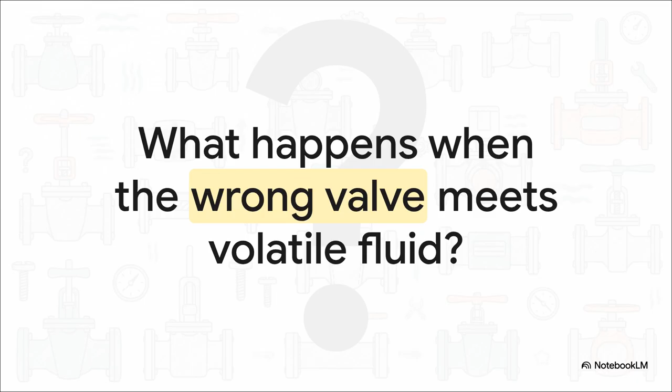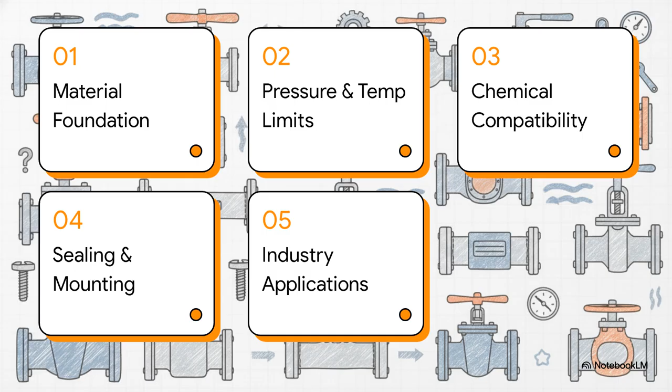Okay, so let's break this down step by step. We're going to cover 1. The material foundation, 2. Pressure and temperature limits, 3. Chemical compatibility, 4. Sealing and mounting configurations, and finally 5. Industry applications. Let's kick things off with Section 1, the material foundation, establishing the baseline.

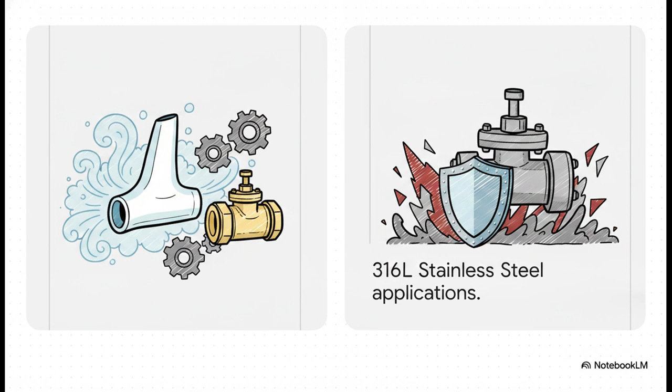Every solid system starts with the right building blocks, right? And in the world of industrial valves, we basically have 3 main characters to play with. First up, we've got polymer, specifically technical polymer. You can think of this one as your lightweight specialist. It's absolutely perfect for compressed air and simpler, less aggressive tasks.

Next is nickel-plated forged brass. This is your reliable standard. It's going to give you the mechanical strength and the long service life you need for a vast majority of universal applications. And finally, we have 316L stainless steel. This is your heavy-duty shield. When the environment is harsh or the fluid is just completely unforgiving, stainless steel is the armor your system needs.

Moving on to Section 2, pressure and temperature limits, pushing the boundaries. Now, check out the stark contrast in these pressure capacities. It's pretty wild. If you're running a basic compressed air or water circuit under 10 bar, a polymer valve handles it perfectly, no sweat. But the second you push past that 10 bar mark, polymer is going to fail. You have to escalate to nickel-plated brass, which can comfortably manage up to 40 bar of pressure.

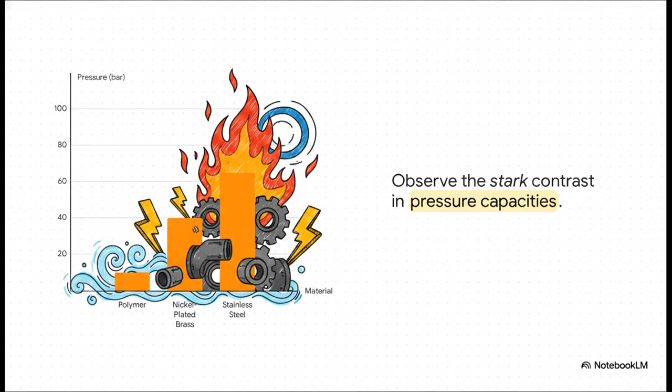But hey, what if 40 bar still isn't enough? For those truly intense, high-pressure industrial applications, 316L stainless steel steps up to the plate, pushing that boundary all the way up to a massive 65 bar. But pressure is really only half the battle here. Temperature is the other piece of the puzzle.

Imagine you're operating a system outdoors in a freezing environment. Your standard polymer might only survive down to minus 15 degrees Celsius, but your nickel-plated brass valves, they can keep going all the way down to minus 40 degrees. On the flip side, if you're dealing with extreme heat, standard brass is going to top out around 100 or maybe 130 degrees. For anything hotter, pushing up to 150 degrees Celsius, and sometimes even higher depending on the setup, you absolutely must rely on the thermal resilience of stainless steel.

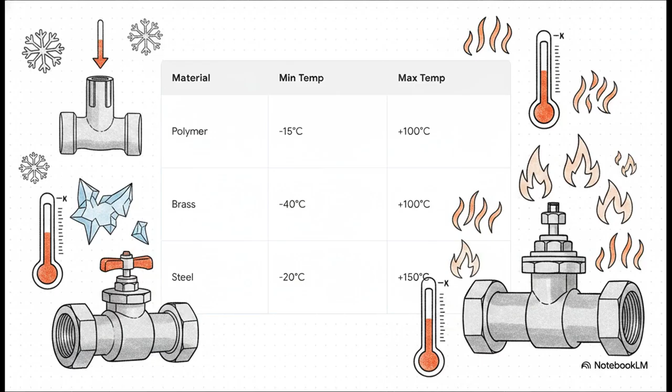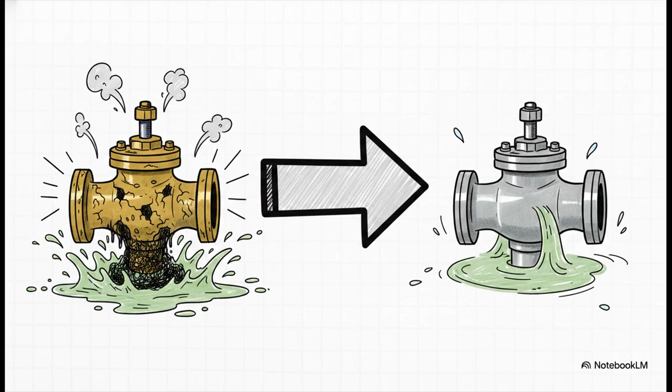All right, Section 3, chemical compatibility, surviving volatile fluids. So here is an absolutely crucial point. What happens when the fluid itself is the biggest threat to your system? It's a super common trap to just assume a rugged brass valve can handle anything you throw at it. But if your industrial circuit is conveying highly corrosive liquids, you've got to pivot immediately from brass to 316L stainless steel.

Stainless steel offers outstanding chemical compatibility, where brass would literally just degrade over time. Trying to use a brass valve for a highly corrosive chemical, that's not a smart cost-saving measure, it's just a structural compromise waiting to blow up in your face.

Let's rapidly run through this guide for volatile environments. Because remember, it's not just about the metal body of the valve, it's about the internal seals too. If you're running gaseous oxygen circuits, you need specifically coated clean seals to literally prevent combustion. For high-temperature water and steam circuits, you're going to want to specify EPDM or PTFE seals.

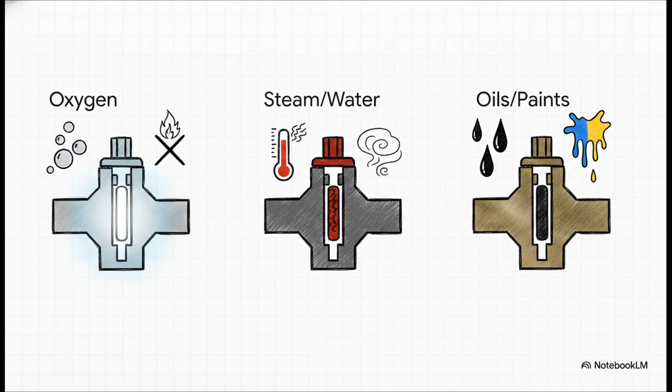And if you're working with synthetic oils, ordinary petrol, or paints and their solvents, a solid brass or steel valve body paired with the right FKM or NBR seal is going to ensure leak-free operation. Which brings us to Section 4, sealing and mounting configurations, securing the system. Take a look at the invisible technology working inside the valve itself.

It's pretty brilliant. Many of these high-efficiency valves feature a patented automatic seal wear compensation system. Here's how it works. First, self-lubricating seals engage, and that ensures smooth operation with really low friction. Now, as the valve gets used thousands and thousands of times, natural friction happens, right? But instead of the seal just degrading and eventually leaking, this patented system automatically compensates for that wear.

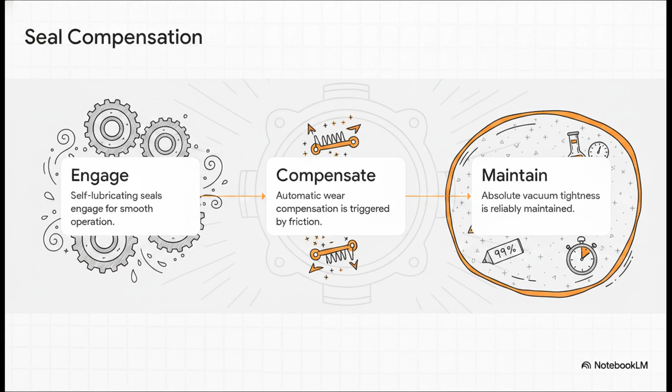The result? Absolute tightness is maintained over a massive lifespan. It guarantees incredible performance even under a strict vacuum of 755 millimeters of mercury. That is a 99% vacuum. Externally, you also have to think about how you're physically securing the valve to the machinery. On one hand, you have a standard inline setup, which is basically the workhorse of most pneumatic and fluid circuits.

But then, consider a high-pressure series configuration that features dedicated fixing screws for through bulkhead or surface panel mounting. What this means is, if you're building a custom machine tool or a really complex control panel, you aren't just leaving the valve hanging loose on the pipeline. You're securely anchoring that forged brass body directly to the panel for maximum stability, even under really severe conditions.

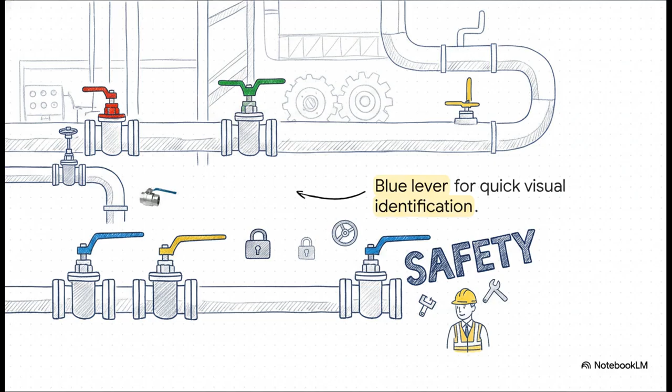And notice the distinct blue lever here. This is super practical. In a massive, complex industrial facility, a technician just doesn't have the time to guess what a specific valve does. So color-coded, repositionable levers allow for really quick visual identification of specific valve configurations and those internal seals we talked about. Plus, these levers can be easily swapped out for butterfly levers or even lockable versions to make sure you have ultimate operational safety during routine maintenance.

All right, last but not least, Section 5, Industry Applications, Tying Theory to Reality. Let's take everything we've unpacked in this explainer and map it directly to real-world industrial systems. If you're in industries like packaging and textiles, where compressed air and lightweight components are the name of the game, polymer valves are your go-to.

Now, if you're operating rigorous vacuum circuits or really heavy pneumatics, the unequaled mechanical strength of nickel-plated brass is for sure your best bet. But if you're working in the food, beverage, or pharma industries, where hygiene, high temperatures, and intense chemical cleaning are just everyday realities, you absolutely need HACCP-approved, fully compliant 316L stainless steel. It all comes down to matching the material to the mission.

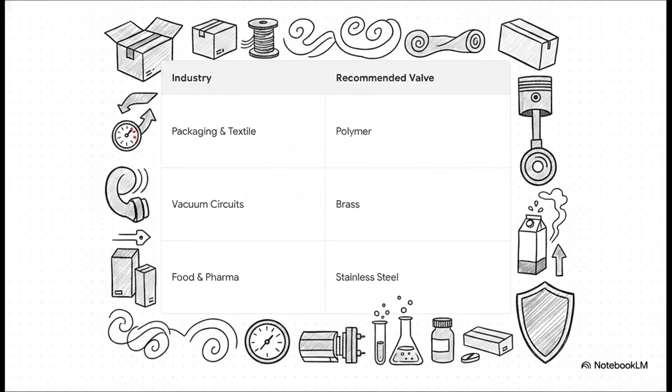Which brings us to our final thought today. I want you to mentally walk through your own industrial circuits right now. You've seen the data. You know the exact thresholds where polymer fails, where brass corrodes, and where stainless steel thrives.

So, are you absolutely certain that the valves you've always just considered reliable are actually rated for the specific pressures, temperatures, and volatile fluids they're handling today? Or are they the ticking time bombs of your next major system failure? Take this framework, reevaluate your gatekeepers, and make sure your system's efficiency is never left to chance.